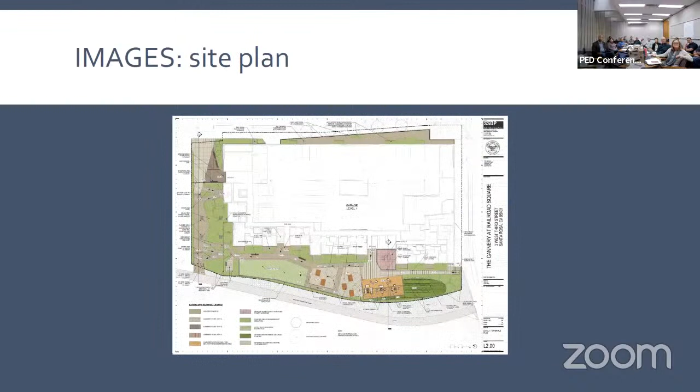And I don't know how big this is, but this is the landscape plan. At the top of the slide is the new road that we're putting in. 3rd Street is to the right. And then to the left, we have the new pedestrian pathway and also the main lobby entrance to the building. So Susie's showing you where the pedestrian pathway is. And then to the right of that is the rear yard for the residents of the property.

We have a dog run. We have a turf area. And then to the right of that, we have some picnic tables. And then to the right of that, we have a wooded deck with a trellis. And then to the right of that trellis, that dark green area, that's a bioswale to hold water on site and to allow it to percolate. It's landscape, but it's not really meant to be used. It's really for the purpose I mentioned.

And then to the north, that little pink square is a tot lot adjacent to a laundry room. So there'll be a lot of eyes on the creek and the pathway along the creek from the building. You can't see it very well here, but there are 2 podium courtyards that are set up approximately 15 feet from the landscape rear yard and approximately 20 feet up from the creek. So in addition to folks activating this backyard, the podium courtyards will be used, and then there are units that face to the back, and then there are all the units all the way up the building.

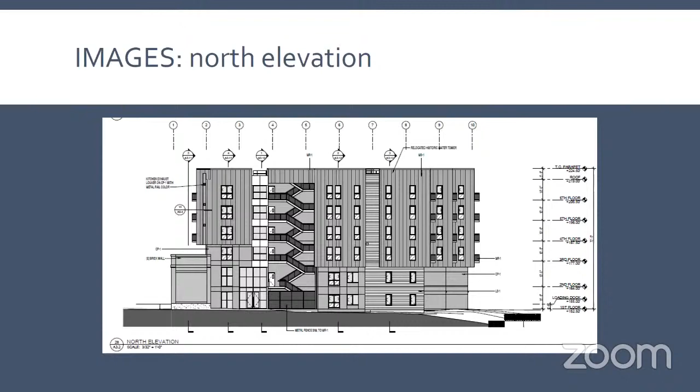Next slide. And this is the east elevation. So this is the long brick wall that runs along the new road that we're installing. Next slide. And then this is the north. I'm sorry, I'm trying to get my orientation here. This is looking south from the Plant 5 site. Next slide. And this is the west elevation, which is the elevation from the creek. And this elevation doesn't really describe very well how the building is set back, because this looks much more monolithic than it really is.

Maybe, Dawn, I could just interject, sorry. Yeah, please. Just so you know, folks, there are basically 3 fingers of building. So there's a spine of units. The face that is on the SMART site overlooking the rail site is one long line of building. And then from that are 3 corridors: the south, the center, and the north. And it's a double loaded corridor, there's units on both sides of that. And then between those 3 extensions of building is open space, and there's a podium.

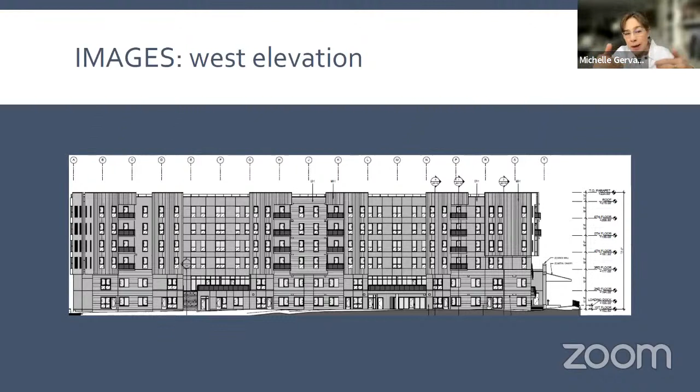So on the top of the 2nd floor, there are 2 podiums, one north and one south, and they have different purposes, different intended uses. One's more chill and one's more formal. So it will not be such a monolithic looking structure as this image would suggest. It's those 2 big cutouts, I don't know if you can point to them, Susie, in the middle that are set back. Yes, keep going up. Yeah, right there. That's the podium, and that's set back, and same here. Those are the podiums that Michelle was discussing. Okay, next slide.

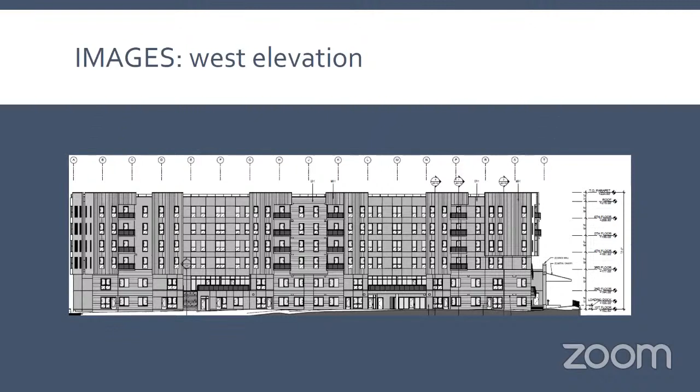And we talked about this. The brick wall is being restored, and I will say it's going to be a lovely feature, but it's a $5 million feature, which did not help us keep this project on budget. All in, this project is a $95 million project, and there's nothing affordable about affordable housing. People often blame low income residents for the construction costs, and projects end up being very expensive for a whole bunch of reasons.

So we're keeping the landscaping along the brick wall to a minimum. We have some planters on the loading dock with some sort of low grassy vegetation, and then on the backside towards the creek, we're planting. Are they almond trees? No, they're not. Olive trees, right? Yeah, olive trees to sort of harken back to the cannery's original use. Then, as I mentioned, the water tower is going to be installed as part of the Plant 5 development.

And this, Mimi's better at this than I am, but you've seen the elevations for the 4 sides, and the design guidelines are pretty strict about modulation and articulation and materials, and so it's going to be a really rich facade, I think. As I mentioned, the building steps back from the creek, and the 3 wings that sort of point out. We went over the backyard amenities and the exterior metal stairs, which I think you can see in one of the elevations, which are really cool. Okay, I think you have one more maybe.

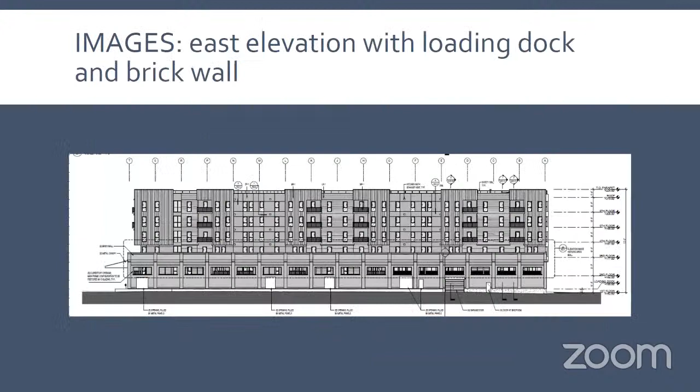I think that's all I've got, but we're happy to answer questions. Thankfully, Michelle's here. She's much more articulate than I am. So feel free to ask either one of us questions. Happy to be here. Excited about the project. Well, thank you. Thank you very much.

So if there are questions, this would be the time. I might add, however, as a committee, our jurisdiction really is the interface between development and creek. So we could talk about Senate Bill 35. We could talk about affordable housing development. We could talk about lots of things today. And I would ask that we limit our questions to the aspects I just mentioned. But please go right ahead. Any questions regarding the development and the creek?

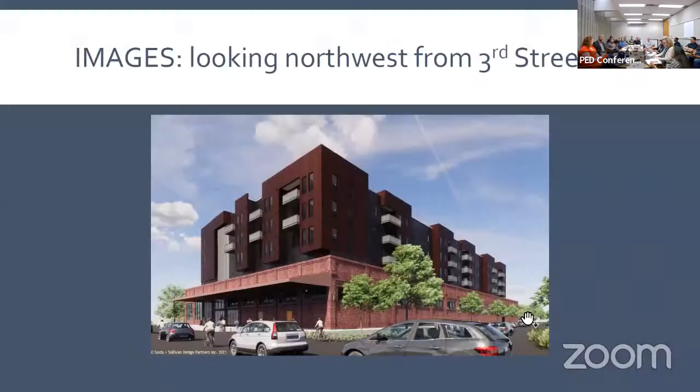I was wondering if technology could get this to do a full screen up there so that we could see it. It was pretty low with its borders and everything. And I wanted to specifically get some more information on the pedestrian access to the creek and how people would get from their particular units to the creek. There are a couple ways. The main way, can you go back to that slide and point, do you see the brown area in the top left? That's the main lobby entrance.

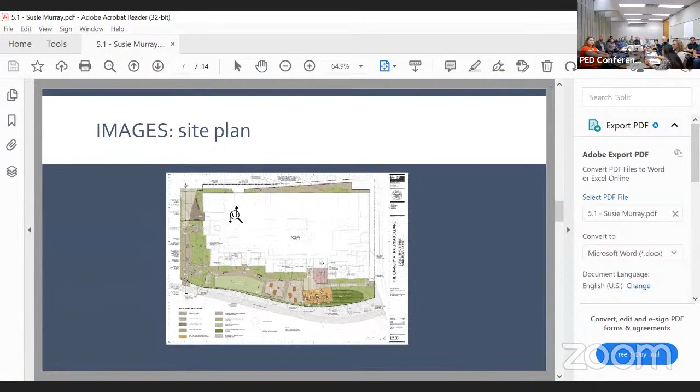I don't know what I'd do without her. The answer would be no. This is why we need architects. They know how to do this stuff. Really. Thank you. Okay, great.

So, can folks see that? Yeah. The brown sort of triangular area to the upper left, that's the main entrance into the building. And so folks could come out that door, and then there's a gate that will be open just to the left of that entrance. Do you see that dark line? Can I read the lines here? I can't see them. It says sliding gate at a public pathway. It's sort of up on the left. That's the entrance that will be open to the public. So residents can come out that way to the promenade. Yeah, right there.

To the left is the main gate to the pedestrian pathway, and then if they're in the backyard, there's an exit only gate that comes out the backyard, and they could come into the pedestrian pathway from the south, from the

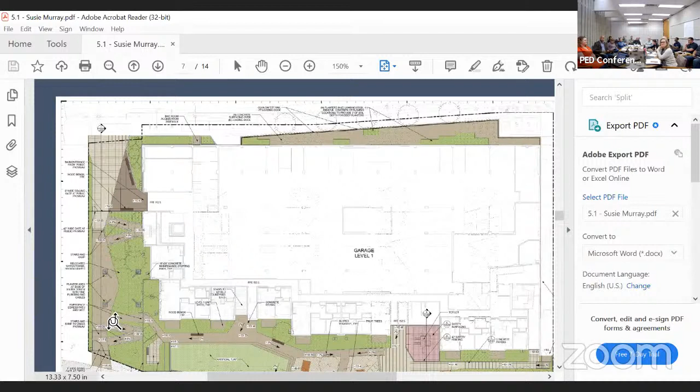Harry? Can you explain to me what a bioswale is? It's such a great word. And if I remember correctly, there's a retaining wall around there, and I think it says 17 feet of retaining wall, potentially. I'm not sure. There's a retaining wall along the creek, and depending on the elevation, I think the height of the retaining wall is between 4 and 6 feet. And I think that's because the grade is not the same along the creek.

But a bioswale is just an area that allows the water to percolate back into the groundwater. Susie probably knows this better than I, but there are requirements about keeping water on site so you're not sheeting water off of your parcel onto adjoining parcels. One of the issues in our built environment is that we've paved over everything. And so when we do get rain, a lot of it runs off to the ocean or wherever it goes instead of percolating back into the ground. And so that's the purpose of a bioswale.

Sometimes projects have man-made, person-made reservoirs, but this is not that. I think bio just means it's sort of the natural method of allowing water to percolate back into the groundwater aquifers. Okay, just one more question.

I was just going to chime in and say it's actually a city requirement. It's part of our low impact development requirement, and it's very limited what types of plants can be planted in that area, although I understand there are some that do okay. It's one of the bigger challenges that this project faced because it's already in a built environment, and the State Water Board, midstream in this review process, changed what types of BMPs, best management practices, were appropriate or allowed.

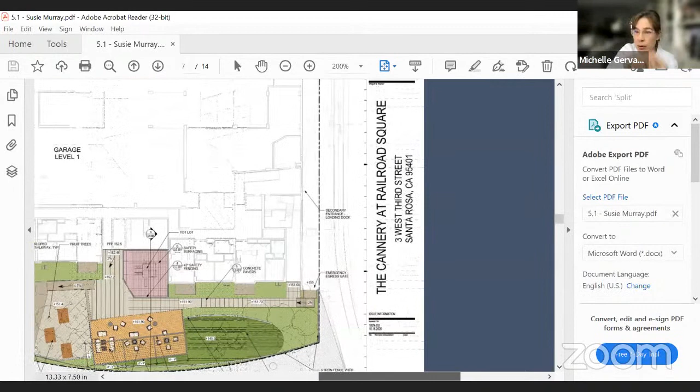You could walk out, there's also a stair on the 3rd Street side, the far right, and it wouldn't be the shortest, but you could go around the building on the road and down. I mean, there are... Right. Yeah. Susie, if you go back to... I'm sorry, go ahead, Michelle.

I was gonna say, there's a stairwell that's right where it says secondary entrance, along the loading dock. There's an exterior stairwell there, just to the left there, that's the note for it. And so it would kind of depend on the experience you're looking for, covered or uncovered. Going to the creek, probably be uncovered and enjoy the backyard and the tot lot.

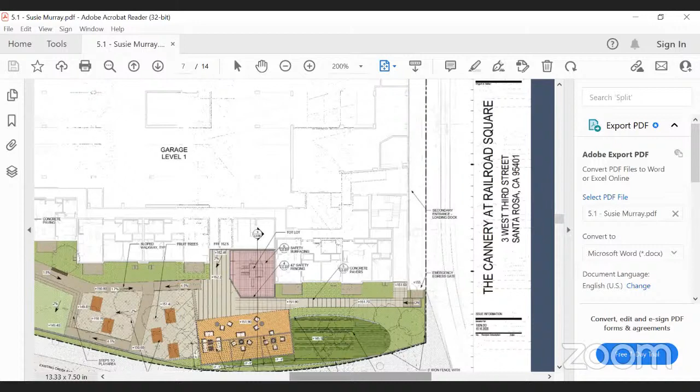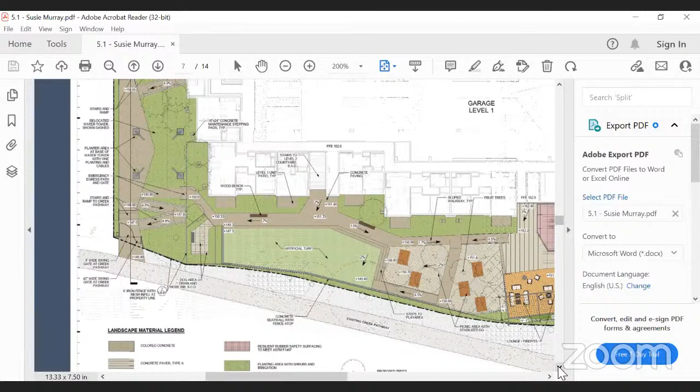And Susie, if you go back to the left, back towards the promenade, there is, and I think this is a fire requirement, an exit-only gate from the backyard. I'm not seeing it, but there is a gate inside of our fenced backyard that goes out to the path. It's a fire requirement, and during the hours of operation for the promenade, you could come out that gate and just make a short jaunt north and then go into the promenade.

Thank you. Questions by anyone? Just really appreciate the presentation. Very thorough presentation. Yeah, we'll have comments in a few minutes, but I agree with you, Art. If there are no other questions at the moment, and we will have time for comments, we're going to open up public input for this item.

And we're now taking public comments. Anyone out there? We do have somebody on Zoom. If you wish to make a comment, please raise your hand. You can do so by selecting the raise your hand icon. If you're calling in, please press *9. We do have one comment. Robert, can you please state your name for the record? I gave you a prompt to unmute yourself.

Hi there. Good morning. In the presentation, fencing along the creek was mentioned. What kind of fencing is that?

It's a really good question. I think it's an open sort of wrought iron fence. I don't think it's actually wrought iron, but it's a black sort of open picket, some kind of wrought iron-like fence. Michelle, does that sound right to you? Yeah, I was thinking it was one of those powder coated metal, but yeah. I don't have that detail. We could find out. I don't recall. But I know it's not a solid fence. I know there are a lot of reasons for that. So it's not a fence that folks should get through, but it's a fence that has visual access.

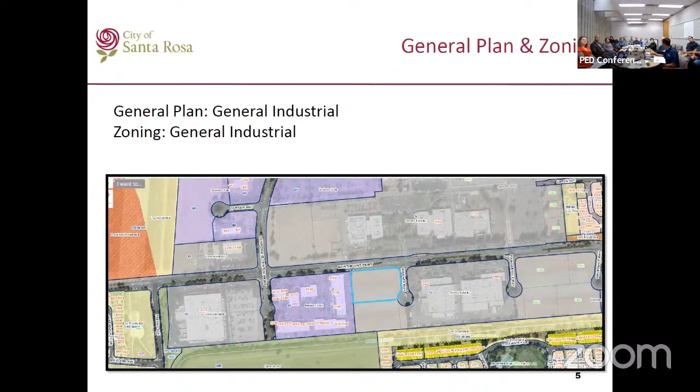The Planning and Economic Development Department requests that the Waterways Advisory Committee provide comments and direction for the Commerce Center located at 0 North Point Parkway. The applicant team is here if y'all have any questions. Okay, thank you. Would you like to make a presentation? I'll go real quickly, throw up the plan. Actually, go to the next one, be better.

We're buying this to fulfill a need for industrial development or industrial projects in the greater Santa Rosa, Sonoma County area. Vacancy currently is around 1% for industrial projects, warehouse distribution, light manufacturing, that type of thing. This was the business park. That's what it was designed to do when it was first done. Originally, JDS Uniphase was the campus there. OCLI was there. A lot of different other uses.

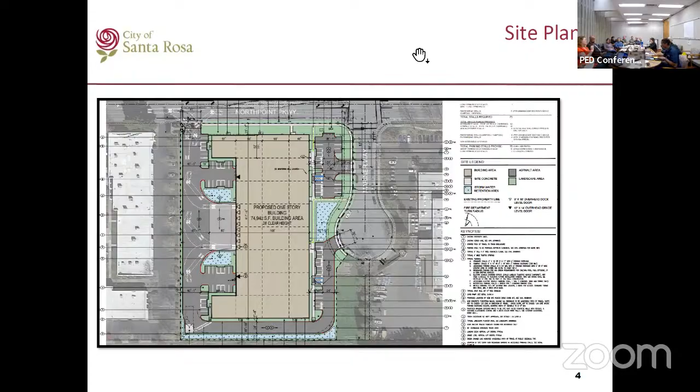I think Art's referring to a conversation that we had offline, but there was an effort over the last few years to really streamline for the applicants, but also for staff. And I agree that it's difficult because when you're seeing projects, they're almost at a conceptual stage, before moving on to their entitlement hearings. It is usually at the beginning of the project phase, so there hasn't been that level of analysis and you're helping inform that analysis. So it is a little bit difficult, but if we move the review for your committee later, that may actually interrupt the formation of the project itself. So it is a balance.

It's something that we've been talking about internally to make sure that we've got the development track aligned with what's necessary for our processing and the streamlining, but also making sure you all have enough information to provide value to the process. So it's an ongoing conversation. We're going to keep thinking about how to best address what you need and try to do better. But with the larger projects, we definitely try to bring more information, and especially if there's a landscape architect involved, having them at the meeting. And that one was further along in the process.

Let me just add that we've actually looked at projects where we felt the projects weren't fully developed enough, and we've said we don't have enough information. We've asked them to come back, which throws a monkey wrench into the system too, which we don't want to do. And so that's another part of the balance. Right. I think that came up with the Stony Point Flats housing project. Yeah. So that's something that we're trying to figure out how to balance. Appreciate continuing to look at that.